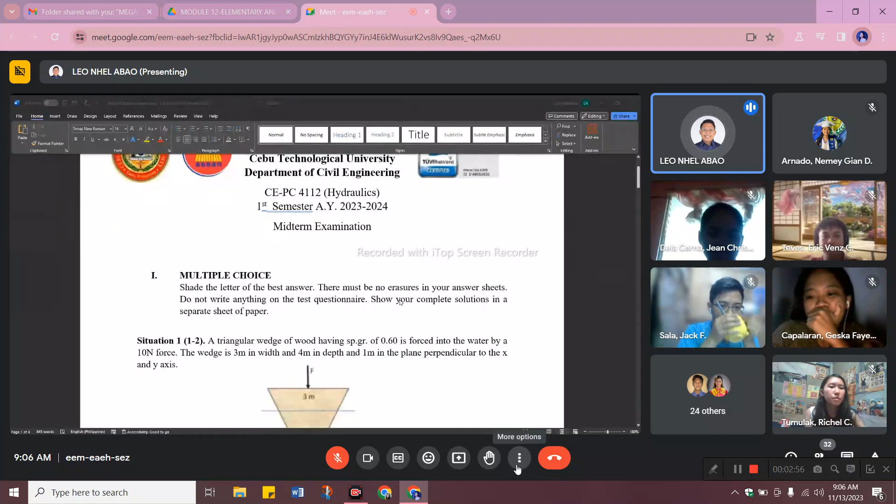Okay, so let us start. This one, situation 1 and 2. A triangular wedge of wood having SPGR 0.6 is forced into the water by a 10 Newton force. How do we solve this problem? Again, BF is equal to W. Remember, this is similar to other types of problems.

Now for BF, we have 9.81 times one-half times X times D times 1. For this X, this is our X — it's not constant since it tapers. And this is our D. This one, give me a moment, join me here.

So again, the most important part is how do we get X? By ratio and proportion. So by ratio and proportion, we can say 4/3 is equal to D over X. Then we get X as 3/4 D. After getting that, substitute it back in. We get our D as this one: 3.1 meters.

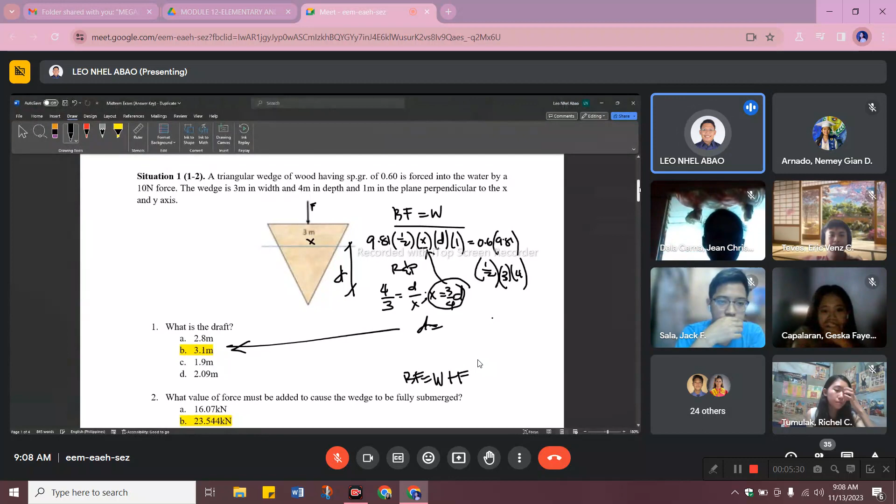So our equation now becomes 9.81 times one-half times 3 times 4 times 1, equals 0.6 times 9.81, so like this: one-half, 3, 4, plus F. Then we get our F as this one. Okay, I hope that's clear.

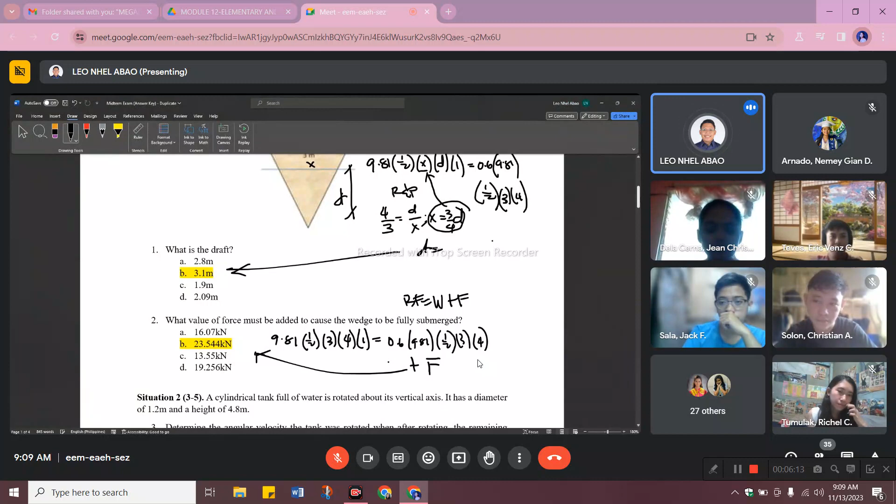Now let's move on to the next situation: a cylindrical tank. Again class, it's not stated here if it's open or closed, but if you look at the given questions, it says the remaining volume was 3/4 of the initial volume. So that means liquid spilled out, leaving 3/4 remaining — so it spilled. Since it spilled, it is an open cylindrical tank. It wouldn't be more full if it were closed, right? So from the problem, you can figure out it's open.

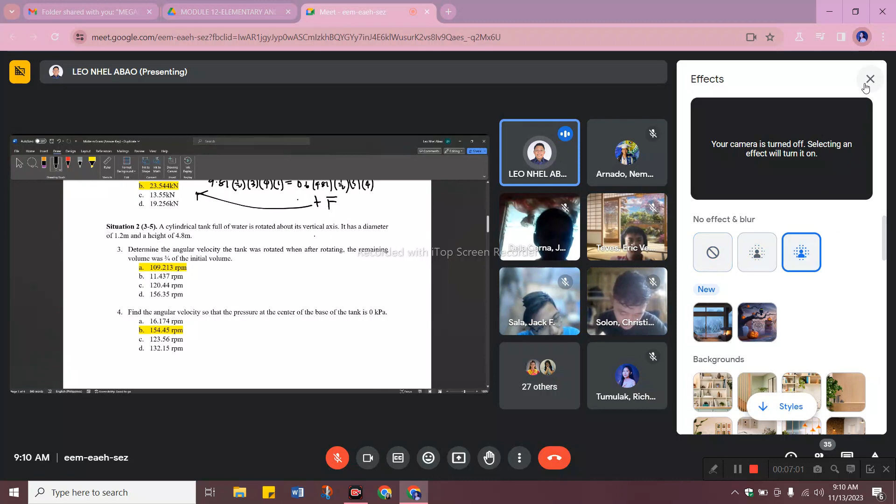Okay, so number 3, we are to determine the angular velocity of the tank. The remaining volume is 3/4 of the initial volume. I won't write out all the figures, so let's have this: Volume initial is just the volume of the cylinder, pi times 0.6 squared times 4.8, which I believe is 5.43. So V final is just 3/4 of this.

It's equal to 4.0725. No, that is in cubic meters.

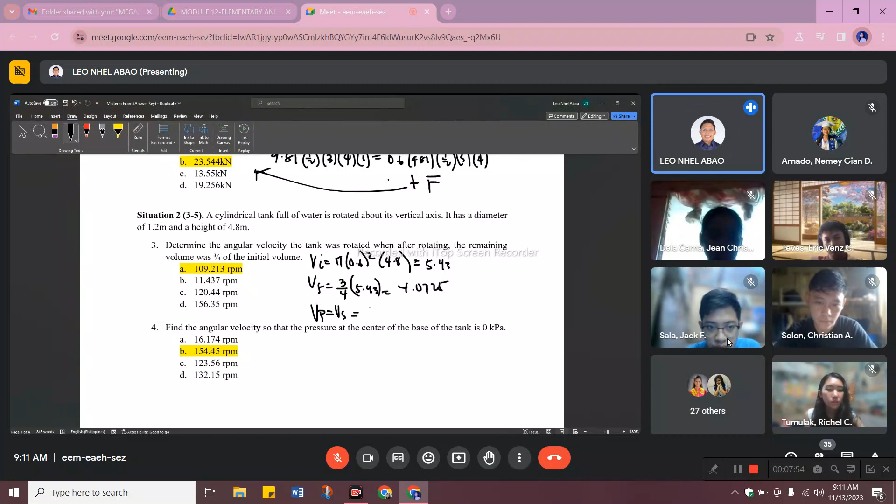Now, volume of our paraboloid is just equal to the volume spilled. Of course, it spilled, right? That's why only 3/4 remained. So how do we get volume spilled? Initial minus what is left, which is now above. So, 5.43 minus 4 point something is equal to

1.3575. Now again, this is just the volume of the paraboloid. So we can say this one, 1/2 pi r squared h is equal to 1.3575.

Letter A. Okay, because we can erase this. Erase.

Now, this one asks for the angular velocity so that the pressure at the center of the base of the tank is 0 kPa. So again, if pressure at the base, we take the height as the height of the cylinder. So what is omega? This is 154 something. That's the answer.

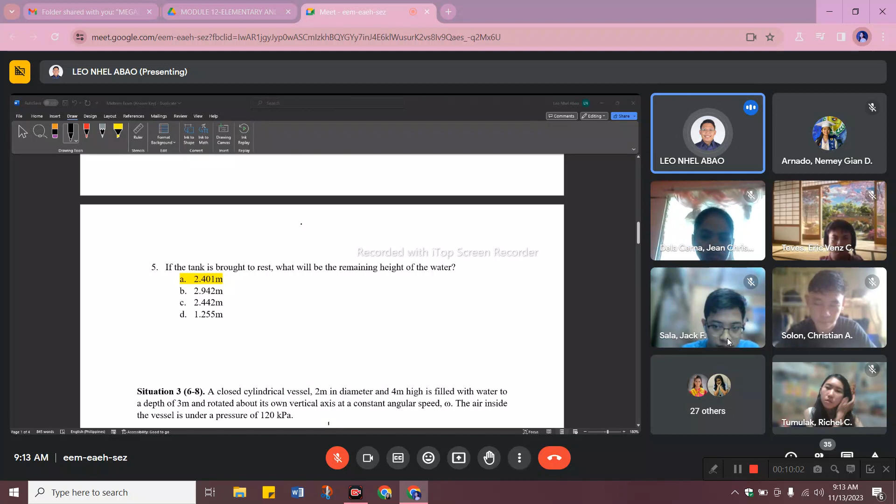So 2.401 meters. Again class, some asked if we should still consider the initial rotation, etc. But class, that is irrelevant. What's important is that it is brought to rest.

Meaning it's no longer rotating. So we can say volume paraboloid is equal to the volume spilled, where the volume of the paraboloid is just 1/2 pi r squared h. Given what we have, this is 2.714

cubic meters. The volume final is just equal to volume initial minus the volume paraboloid. So, volume initial, we get 5.43 minus 2.714. The answer is 2.716.

Okay, so this one, equating it to the volume of the cylinder, finding H, we have 2.401. Okay, that's the remaining height of the water.

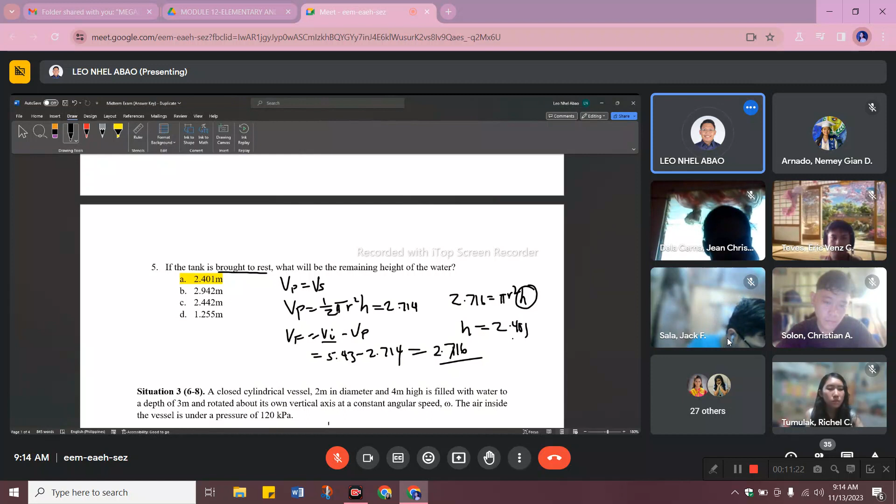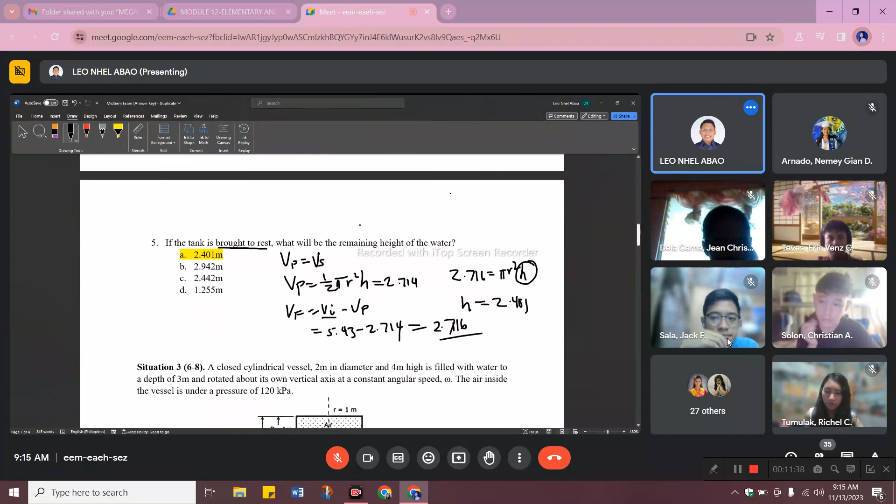Okay, let's move on to situation number 3. Closed cylindrical vessel. Let's go straight to the answers. Again class, I won't show the full solution since it's quite long.

So the answer is B, C, C for situation 3. You can find the solution in the reviewer. That's where I got this from.

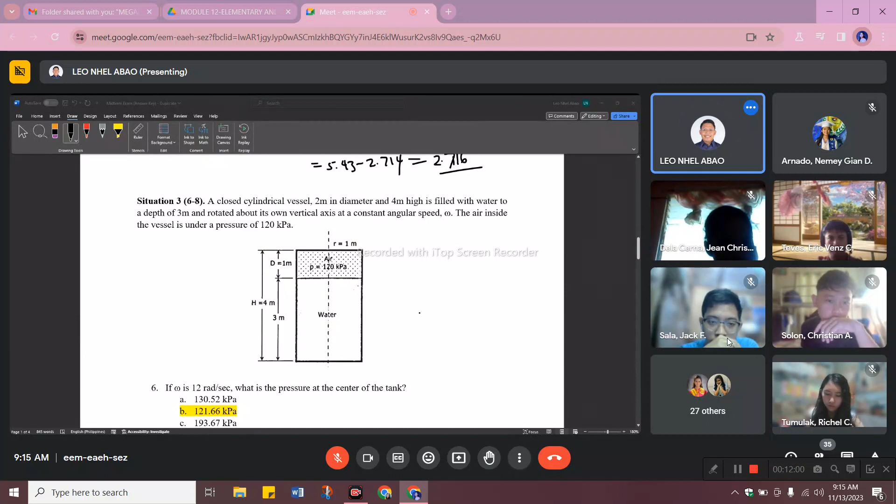Okay, and then if we set our omega to 20 radians per second, how much area of the bottom is uncovered? So that's the answer.

Now let's discuss the terms. Volume of fluid passing a cross-section of a stream is discharge. Okay, so again class, the keyword there is unit time. When we say unit time, it's a rate.

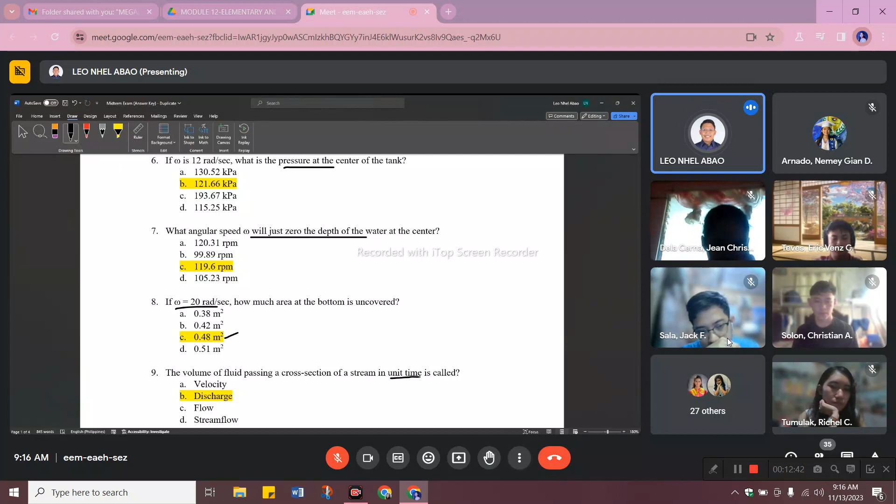So regarding the unit of velocity, class, what is the unit of velocity? Meters per second, sir. Meters per second. So that's wrong then, no? Because someone said volume. But it's not volume, so that's wrong.

What is flow? Flow versus flow rate. Again, flow is different from flow rate. Flow rate is the same as discharge, they are the same. Okay so again class, the answer here is discharge, volume over time.

Now, this one: the flow is said to be turbulent, where the path of the individual particles are irregular and continuously cross each other. Okay, this is what we discussed this morning about the types of flows, like laminar versus turbulent, where the path zigzags. So it's turbulent flow.

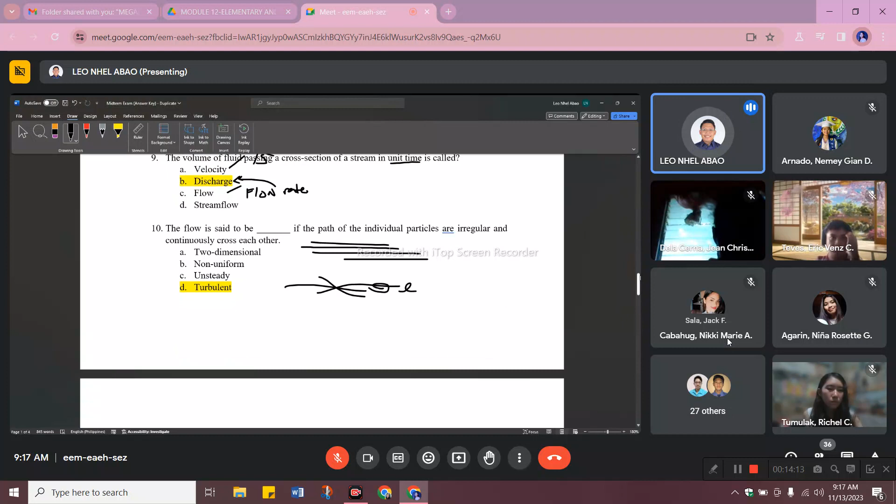Let's move on to this one, situation 4. I won't show the full solution since it's direct substitution. So, water flows through a 100 mm pipe at a velocity of 5 meters per second.

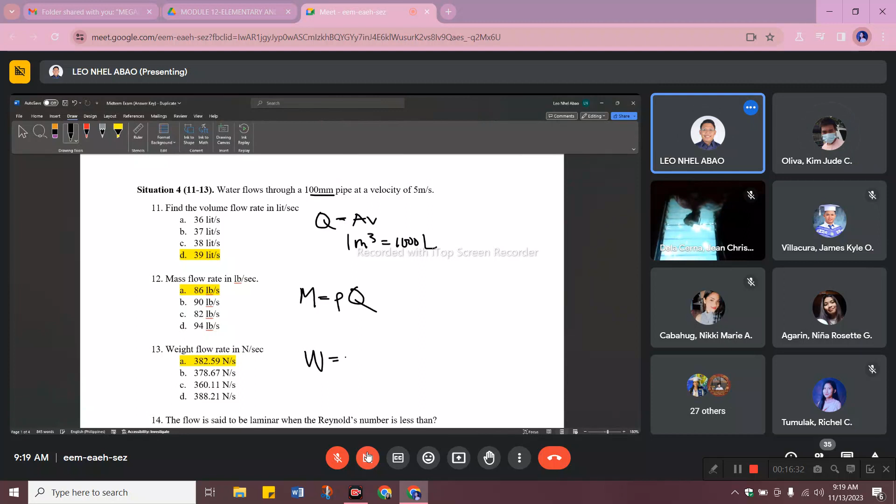How about weight flow rate? I believe I gave you the notes on this earlier. Weight flow rate is specific weight times Q, or you could also use rho times G times Q. So it's direct substitution again. You will get 382.59.

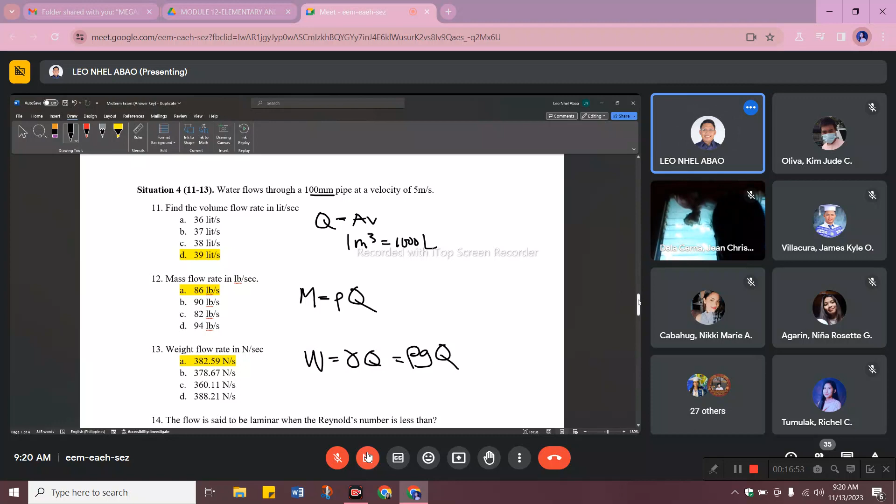Number 14: Flow is said to be laminar if it is less than 2,100. The device used to measure pressure heads in pipes where the liquid is in motion is called a piezometer.

So a barometer measures atmospheric pressure. A manometer is used for this. One famous type of manometer is the U-tube manometer, which is what we solved earlier.

A Pitot tube, for example, is used for moving fluid, shaped like an L. It measures the stagnation pressure. Later on, regarding fluid flow in pipes, we'll discuss the piezometer and the Pitot tube.

So this one, situation number 5. Gas flows through a conduit as shown. Again, class, number 16, where we determine the mass flow rate at section 2.

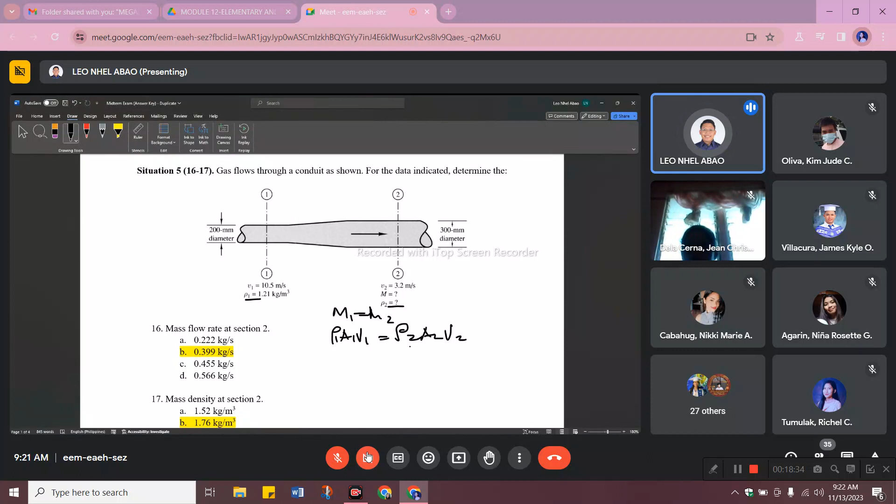So simply, class, we use continuity. We can say rho1, A1, V1 equals rho2, A2, V2. Since we're given different densities, we know this is M2. So to get M2, we just need to solve this, and since everything is given, it's direct substitution to get the answer.

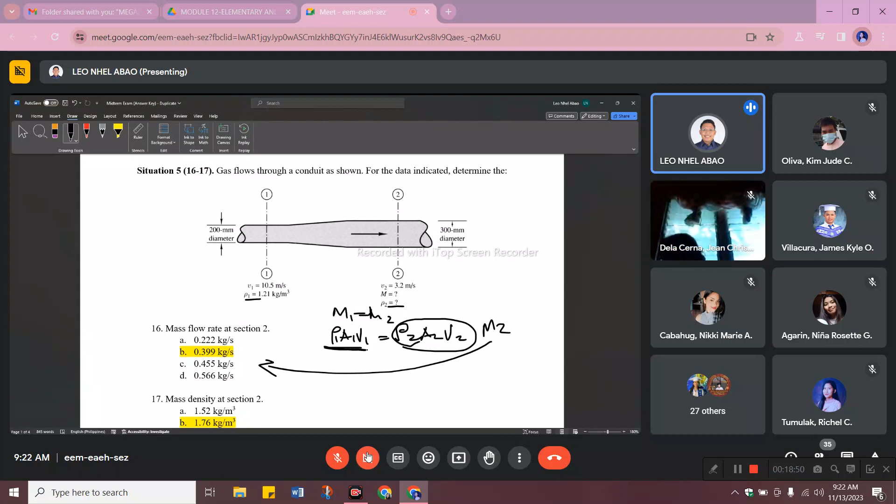Next is the mass density at section 2. So again, rearranging the formula, we are asked to find rho2, density 2. Simply rho1, A1, V1 over A2, V2. So we get density 2 as 1.76.

Okay, next, situation 6. I believe it's the same, same approach. So velocity at section 1, using continuity: A1, V1 equals A2, V2. So again, how do we get area 1? Pi over 4 times D1 squared, times V1.

But first we need to find this. So therefore, we can set up the equation so that V1 equals D2 over D1 squared, times V2. Given V2 is 5, therefore we get V1 as 11.25. Again class, direct substitution.

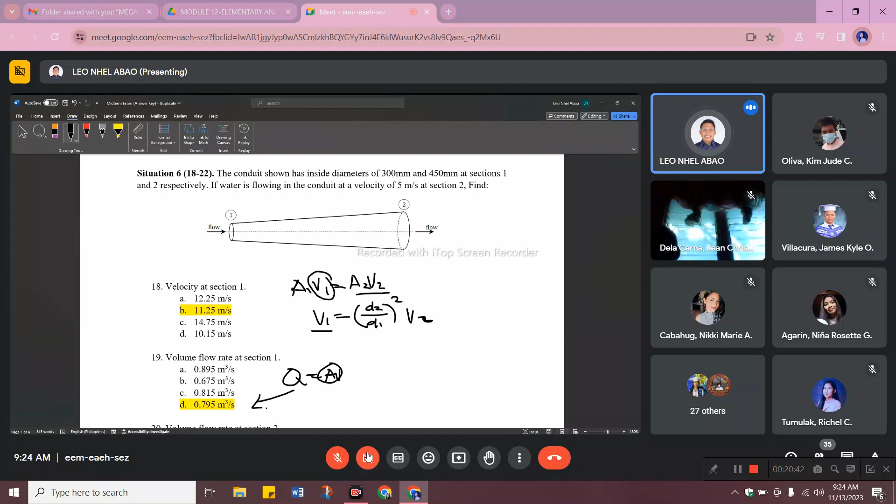What's left? Volume flow rate at section 2. This is just the same. Again, by principle, Q1 equals Q2. Why is that? Because fluids are generally incompressible. For incompressible fluids, there's no change in density. If we compress a fluid, the density becomes greater or more concentrated. So it's the same, by virtue of continuity.

But if you need to prove this mathematically, we can say: area 2 is pi over 4 times 0.45 squared, times 5. So, 0.45 times 5. I believe our Q2 comes out the same as before.

Now the weight flow rate. Weight flow rate is just this, or again, you can use this formula. I prefer to use this one: density times 9.81 times 0.795. We get this value.

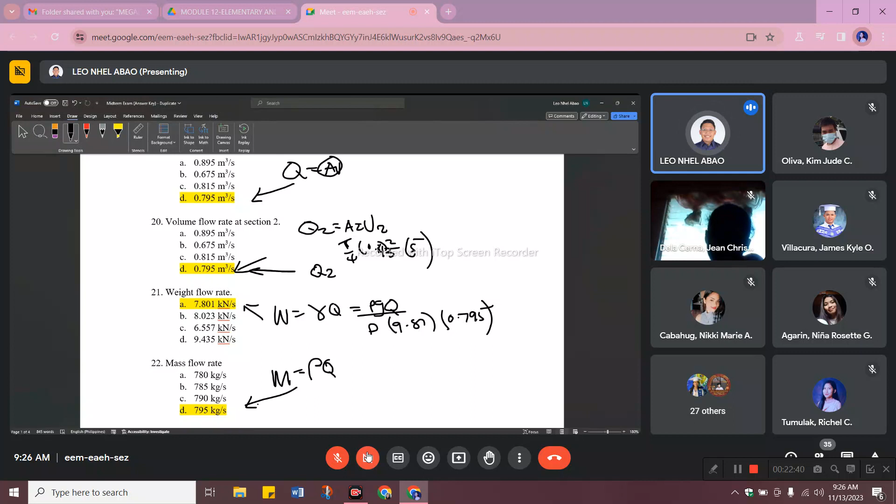Which of the following statements is incorrect? Letter A: Reynolds number is the ratio - the correct definition is the ratio of inertial over viscous forces, so this one is wrong.

Bernoulli's equation holds true along the streamline - this is correct, and we'll discuss this later on. For fluids at rest, the pressure is equal in any direction by virtue of Pascal's principle.

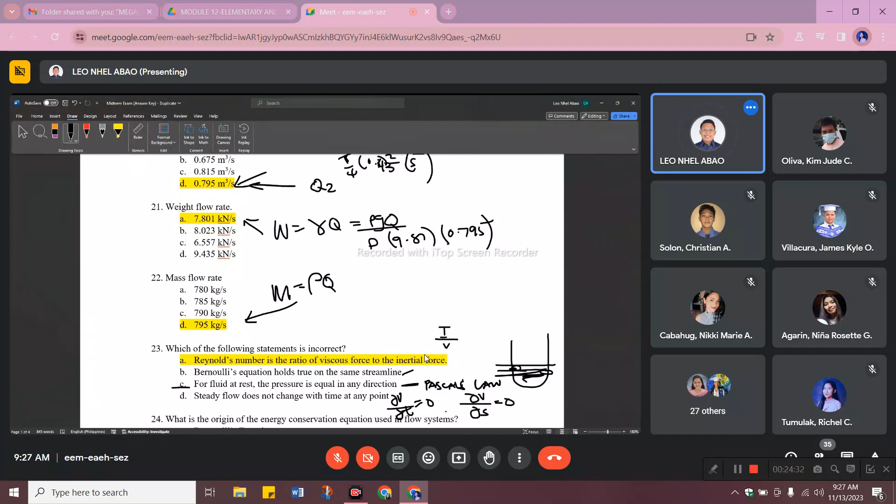Okay, we'll discuss this later on. Number 24: origin of the energy conservation used in flow systems. This is the first law of thermodynamics.

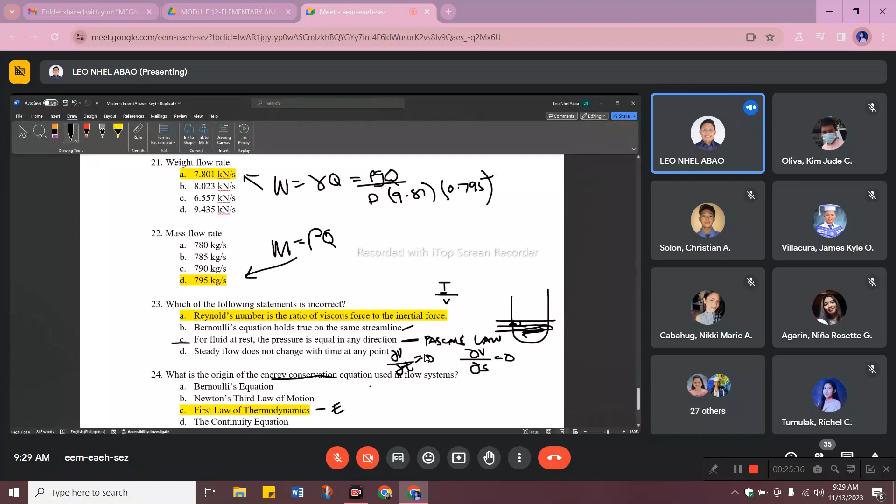Number 25: average velocity at cross-section is the same in any length or reach of a stream. We have uniform flow.

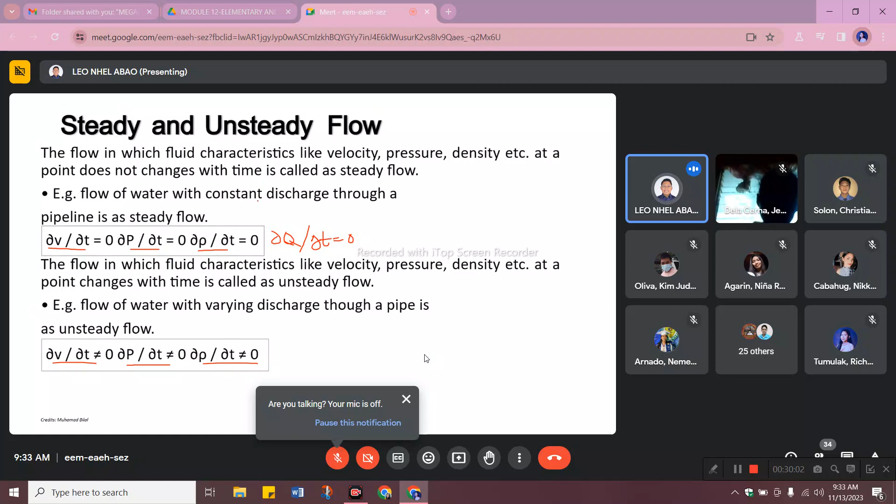For uniform and non-uniform, again imagine when it's uniform - it's clean flow. What is non-uniform then? There's a difference - it does not change with respect to a certain distance or length. That's why in this case, we use the variable s to indicate distance, meaning the velocity does not change with a specific length, so it equals 0.

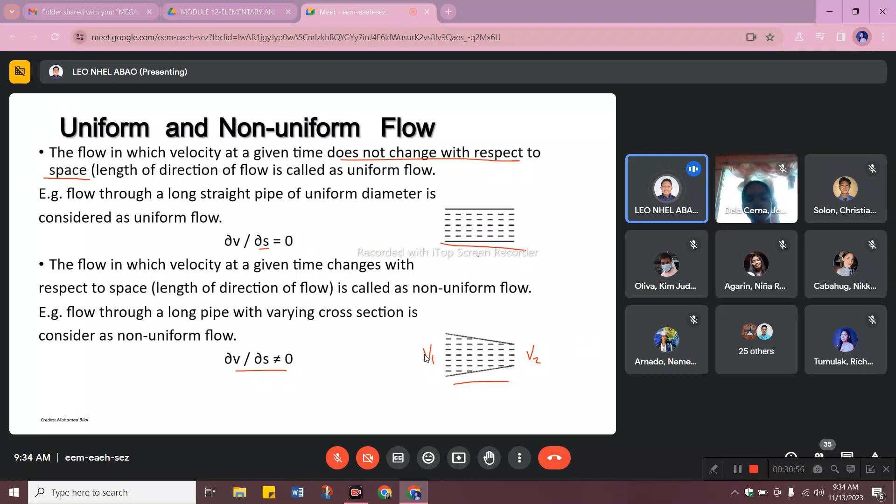So steady flows and unsteady flows can be either uniform or non-uniform. For steady uniform flow, the flow is steady and the cross-section is uniform. For non-uniform, the flow is still steady, but it tapers later on, so the flow becomes non-uniform.

Now for unsteady flow, it is uniform but not steady - the velocity changes with respect to time. For non-uniform, again it tapers and is not steady, so the velocity changes with respect to time.

Now let's go to laminar and turbulent flow. This is laminar, and this one is the turbulent.

Laminar flow is when the adjacent layers do not cross each other, or it moves along a well-defined path. An example here is the flow in our blood vessels - well-defined path. If ever it does not move in a well-defined path, maybe during high blood pressure or tachycardia, but basically it moves in a well-defined path.

When we say turbulent flow, adjacent layers cross each other - it does not move along a well-defined path. In this case, this is a turbulent flow. General examples are flows in a river or canal, or smoke from a chimney, in cases of gases.

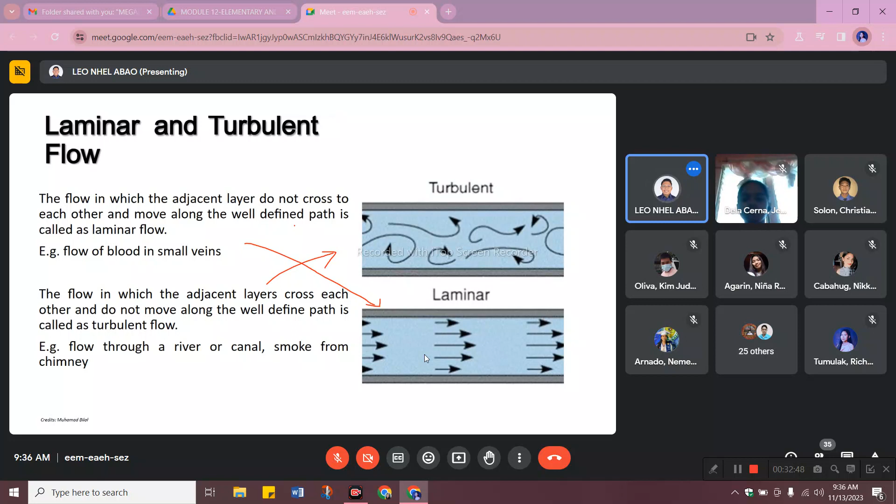We also have compressible and incompressible flows. So question class, is water compressible or incompressible? Compressible, sir. Compressible, okay? That's what they say - that water is compressible.

If you take a syringe, like an injection, and put water in it, cover it with your fingers and try to compress the water in there - can you compress it? No, sir. So generally class, liquids, good example is plain water, is treated as a non-compressible fluid.

So water we treat as incompressible. Unlike gas - if you plunge it, it can compress significantly. So in general, gas is much more compressible than liquids.

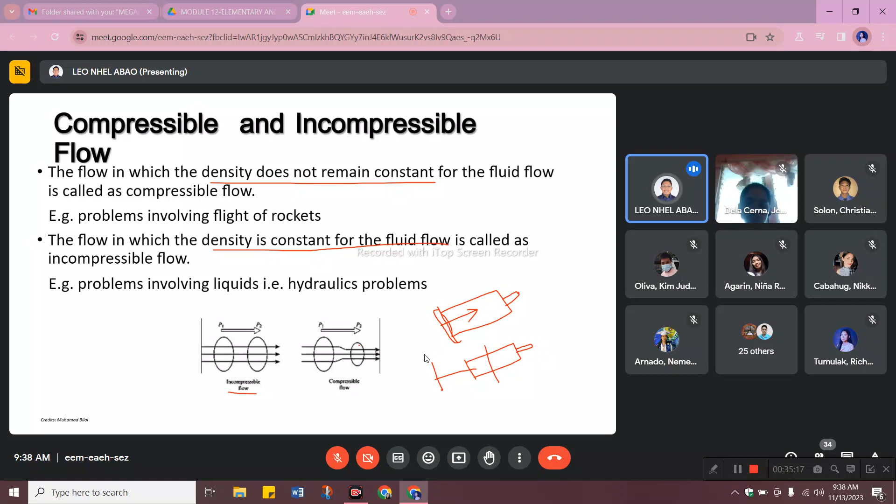Now, discharge or flow rate. Again, flow rate is just the amount of fluid passing through a section per unit time - amount of fluid in liters or cubic meters. So there are different expressions or forms of flow rate - it could be using volume, mass, or weight. Let's go through these formulas as discussed.

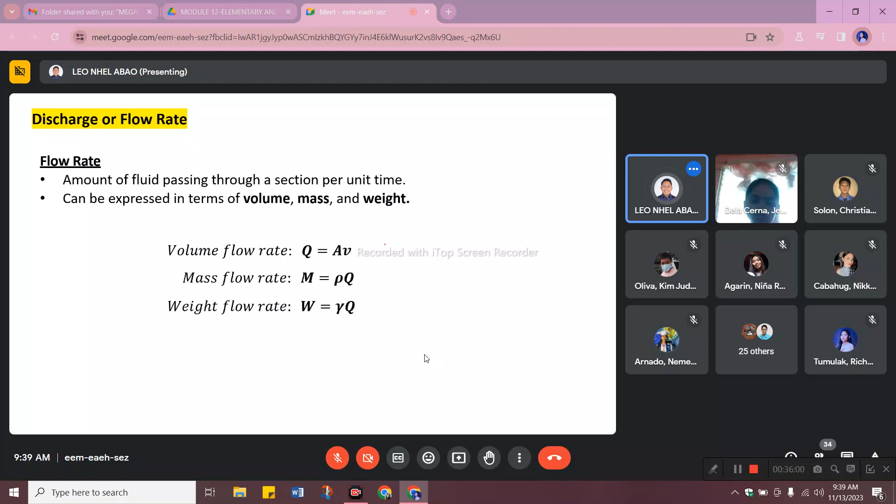Q equals AV. Mass flow rate M equals density times Q. Weight flow rate equals unit weight times Q. Now let me clarify the units, since this might be confusing. The unit for Q is cubic meters per second - AV, where area is in meters squared and velocity is in meters per second, so it equals out.

For mass flow rate, the unit is kg per second - this equals density in kg per cubic meter times cubic meters per second for Q. Cancel out, and we are left with kg per second.

For weight, we have newtons or kN per second - don't forget the kN. So unit weight is kN per cubic meter times cubic meters per second, giving us kN per second. Again, same concept, just expressed differently.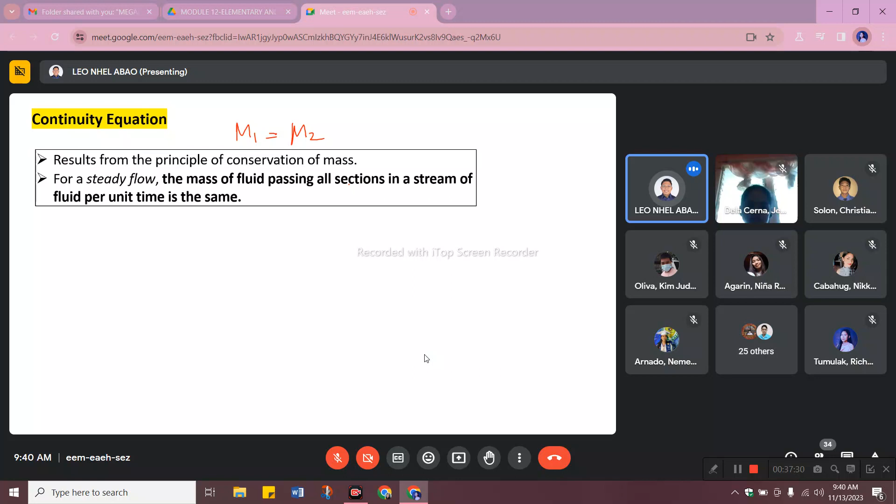Let's talk about the continuity equation. The continuity equation results from the principle of conservation of mass, meaning the mass flowing at one point is the same mass flowing at another point - just like rice being measured. So for a steady flow, the mass of fluid passing all sections in a stream of fluid per unit time is just the same. That's what continuity means - what goes in comes out.

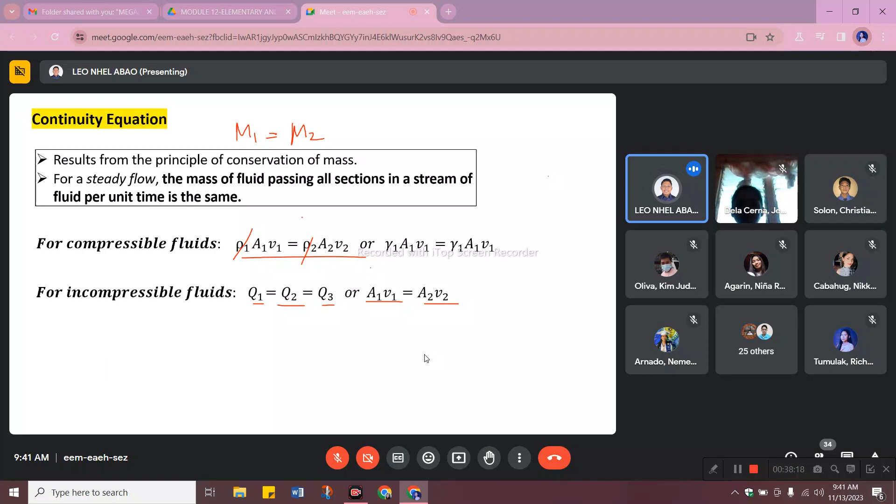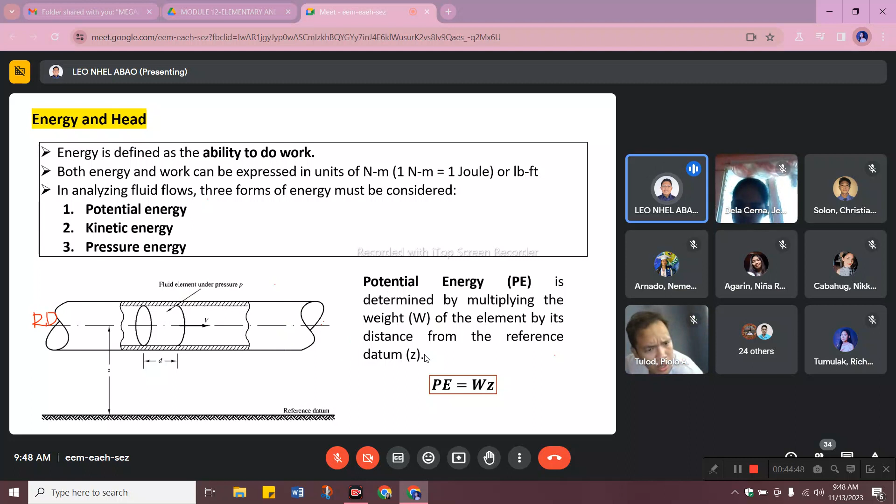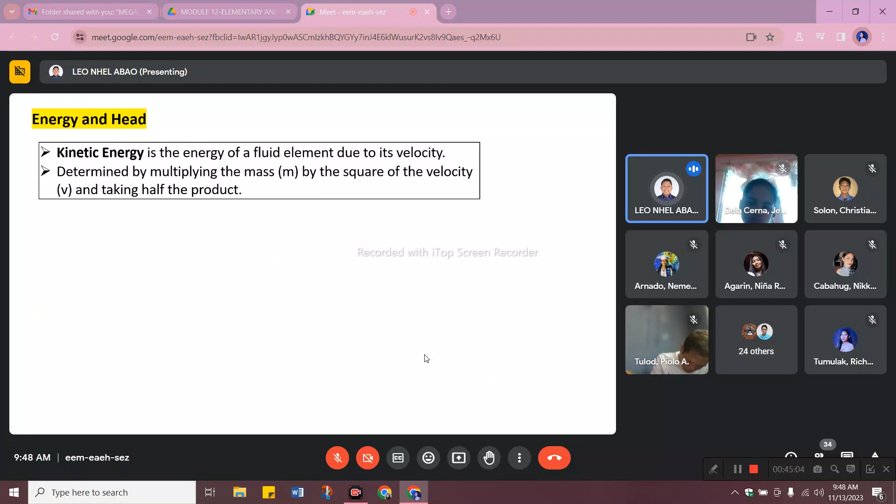Now let's go to kinetic energy. Kinetic energy is the energy in motion, or the energy of a fluid element due to its velocity. This is determined by multiplying the mass by the square of the velocity and taking half of the product. I believe this formula is very familiar: kinetic energy is just 1/2 mv squared, mass multiplied by velocity squared, then divided by 2.

Now since we're talking about fluid flows, let's rewrite this by expressing m in terms of weight. So our equation for kinetic energy becomes 1/2 wv squared over g.

Let's move on to the final one, pressure energy, also known as flow energy. This is the amount of work required to force the element of fluid across a certain distance against the pressure. In textbooks, the usual notation for this is FE, since PE is already potential energy. This can be evaluated using this equation: it's just the work done, the product of pressure, area, and length.

Again class, we can also rewrite this in terms of volume, since we know that area times length (AD) is just volume. And we also know that volume is equal to weight over unit weight, since unit weight equals weight over volume. So by rewriting, we get this equation, which is now our flow energy or pressure energy.

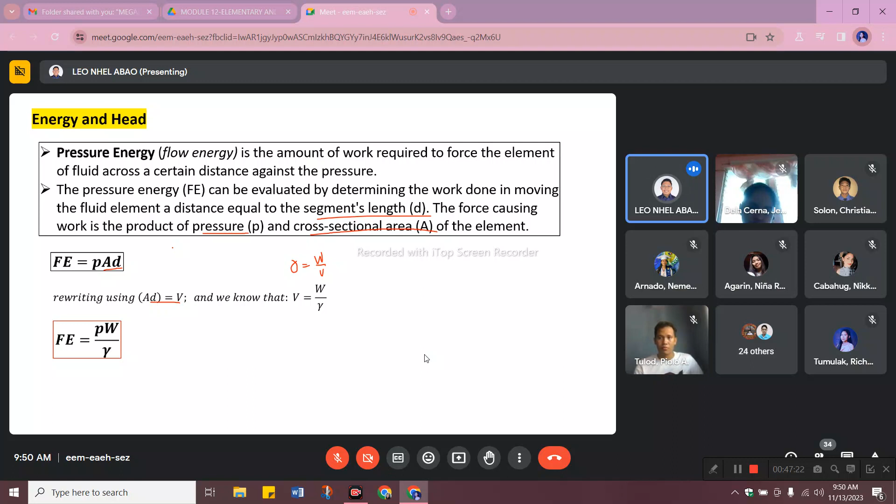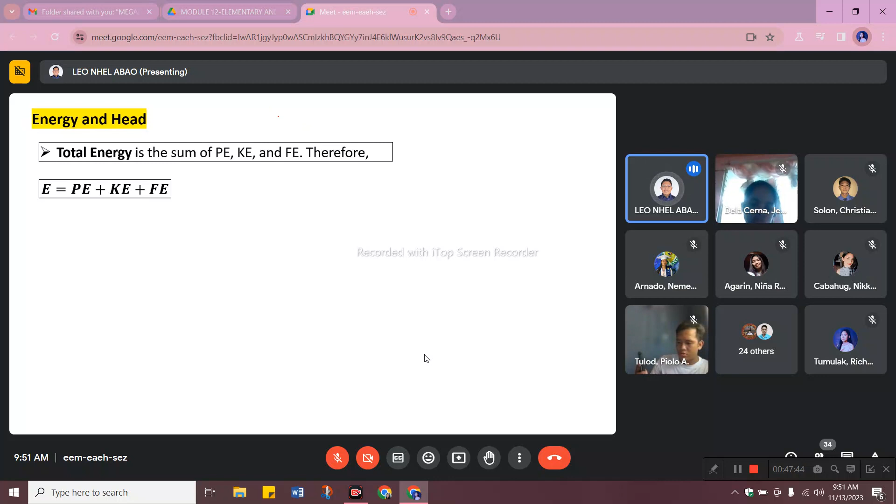Now let's talk about total energy. Again, there are three forms of energy. So in order to get the total energy, we sum up all three: we simply add PE, KE, and FE. Therefore our equation becomes this. So this is the total energy that flows in a pipe system.

So this one here is our potential energy, this is our kinetic energy, this is our pressure energy. Again class, this is in energy notation when dealing with fluid mechanics, where each term of the expression has units of N-m or pound-foot, since these are all forms of energy, and we know energy has units too.

Now, when we deal with fluid mechanics class or hydraulics problems, it's usually expressed in terms of head. If you recall from prelim, we discussed what's called pressure head. So energy is often expressed as head, or the amount of energy per unit weight of a fluid. The units of head are in meters or in feet, since it's easier to measure when expressed in terms of head.

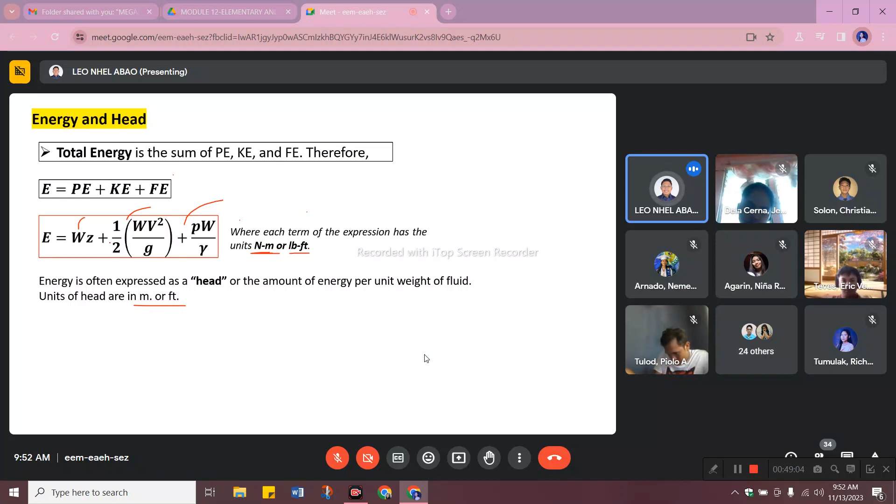For example, by the continuity equation, energy 1 equals energy 2, by the law of conservation of energy. If we divide both sides by weight, it remains the same - what goes in equals what comes out. Now our equation becomes this one in terms of head. Each term here, I divided by weight.

So this is now our equation in terms of head. We have Z, this is known as the elevation head. And this term, V squared over 2g, is now our velocity head.

Pressure over unit weight - this is now the pressure head. If you remember, pressure is equal to unit weight times height. Therefore, our pressure head is just this.

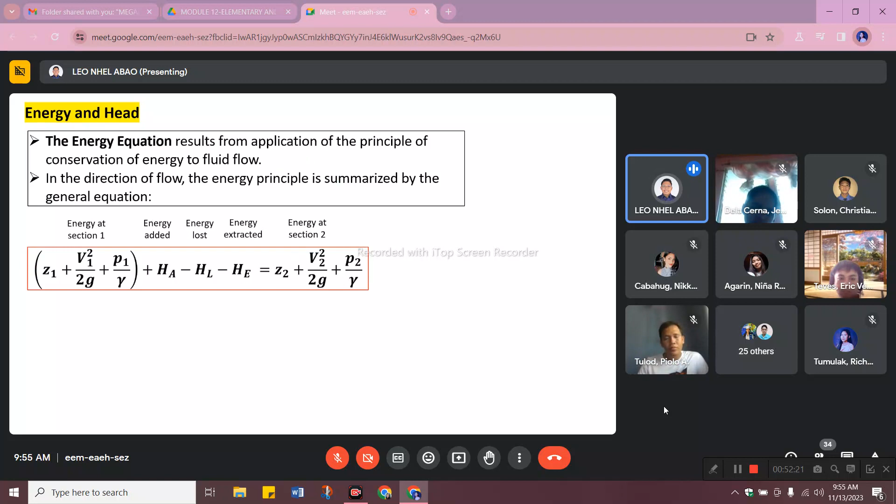So basically, in terms of head, this is the energy at section 1. We have here the potential, the kinetic, and the pressure, plus energy added.

What case do we have where energy is added to a fluid flow? For example, you want to bring water up from the first floor to the 10th floor. You need a large amount of energy to do that work, right? So what do you do? We add energy.

How do we add energy? By pumping it, so the water can rise. One way to add energy is we use a pump. This is the most common case in fluid mechanics problems - there's energy added by a pump introduced into the system.

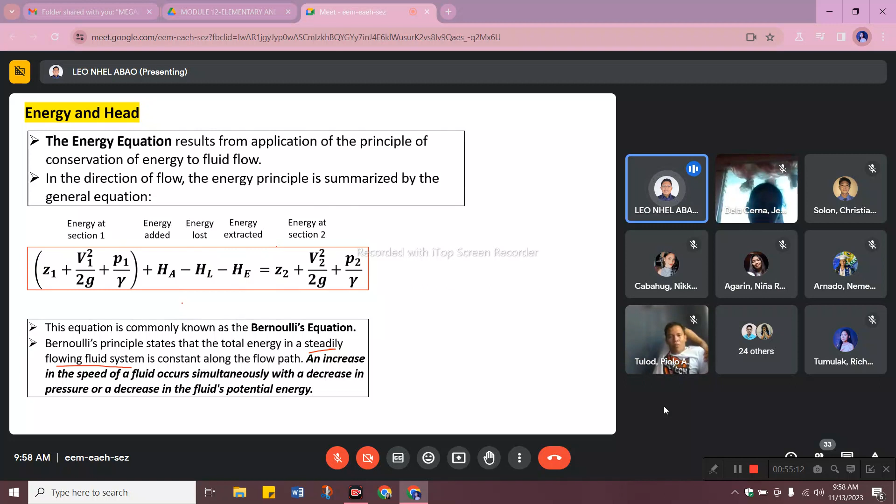Now let's move on to Bernoulli's equation or principle. According to Bernoulli, the total energy in a steadily flowing fluid system is constant along the flow path. He said an increase in the speed of a fluid occurs simultaneously with a decrease in pressure or a decrease in the fluid's potential energy.

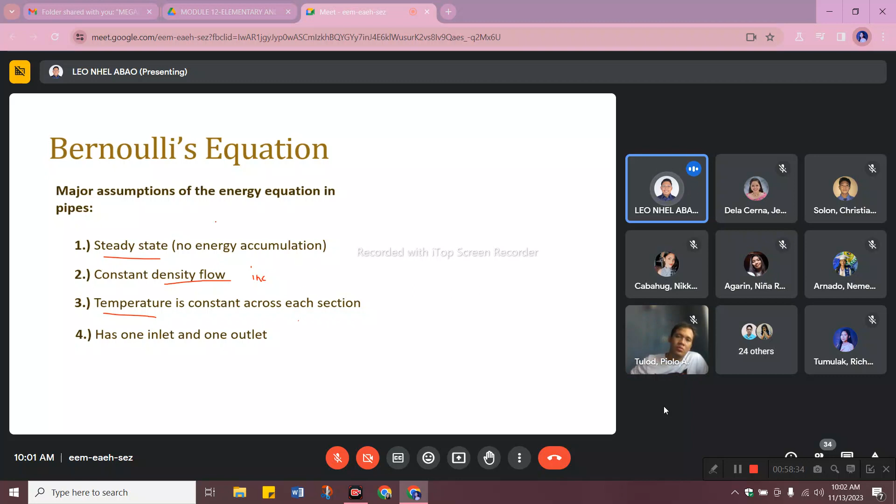Temperature is constant across each section. This temperature assumption takes more effect if our fluid is a gas. So usually this is applied in thermodynamics. Number 4, there is one inlet and one outlet. Okay, so those are the basic assumptions of Bernoulli's equation.

So we have two important terms here. We have the energy grade line, also known as the EGL. We also have the hydraulic grade line, or the HGL. So both of these are just graphical representations of the energy in our flow. Again class, these are just graphical representations of the total energy of the flow. Where does this representation come from?

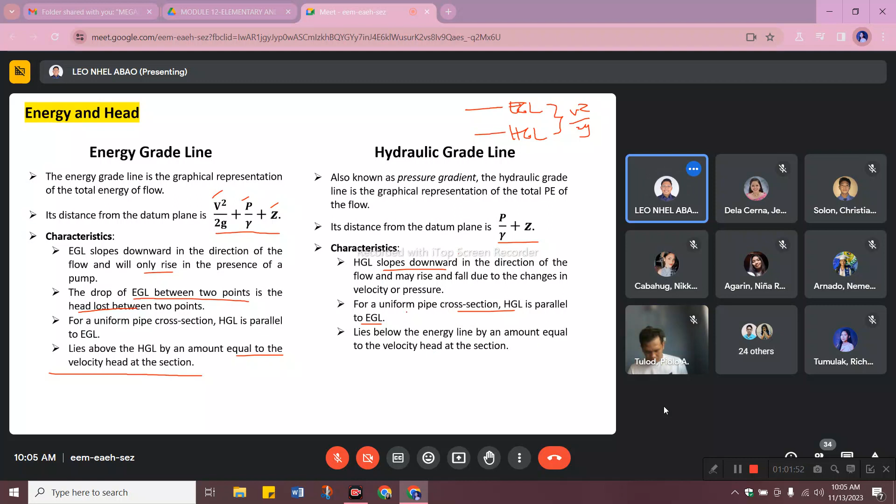Okay, now what is this one class? Again, HGL is just the sum of the elevation head and the pressure head. So HGL equals elevation head plus the pressure head.

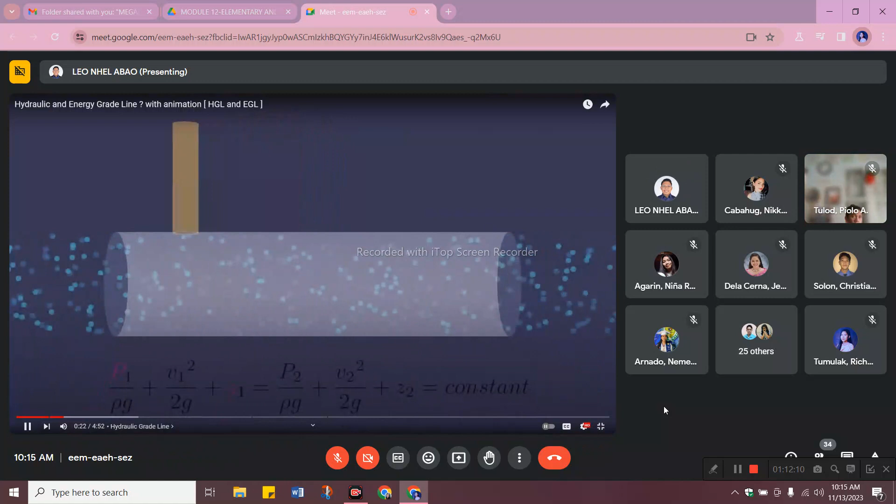Hydraulic grade line can be visualized with a piezometer tube. It measures static pressure by calculating the liquid column height through the center of the pipe. If you tap a piezometer into several locations and draw the curve through the liquid level, the hydraulic grade line is obtained.

Notice, the hydraulic grade line just represents the sum of static pressure and the elevation heads. Elevation head depends upon the datum we choose. Now we choose the center of the pipe, but we can choose anywhere.

Now what if the same pipe is inclined? In this case, a change in elevation head will affect the hydraulic grade line. With change in elevation head, there results an increase in hydraulic grade line.

You can imagine hydraulic grade line as potential energy, which is related with Earth's gravity and datum. Energy grade line is the sum of potential and kinetic energy, so it's the total energy of a fluid. In order to visualize kinetic energy, which is related with the velocity of water, we need a pitot tube.

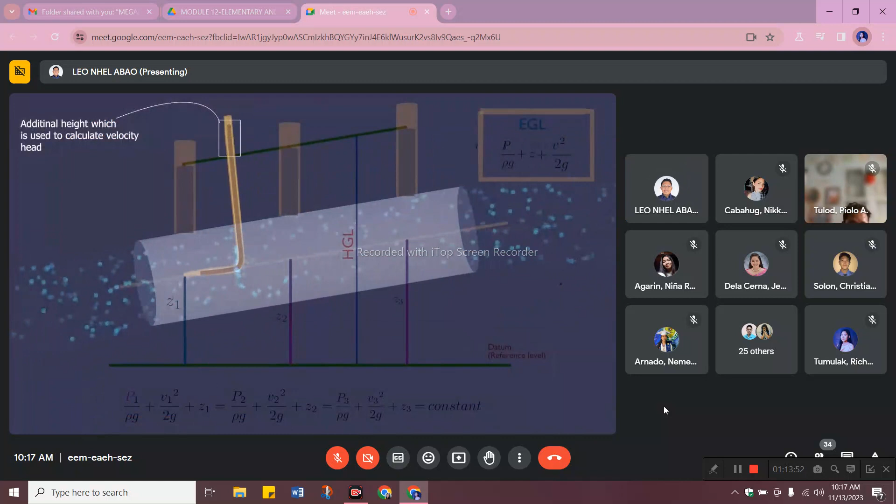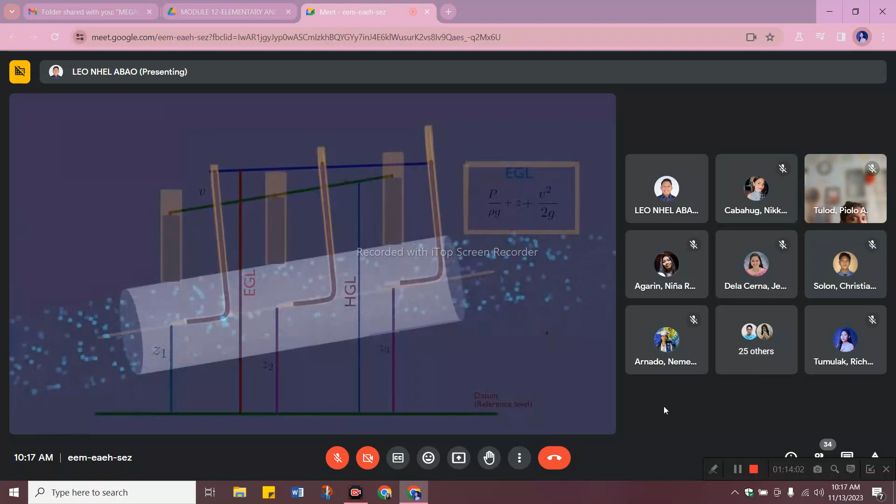The extra height the water column travels is related with the velocity of water, and if you draw the curve, you will get the total energy, also called the energy grade line. The distance between EGL and HGL is the dynamic or velocity head. You can also imagine it as kinetic energy.

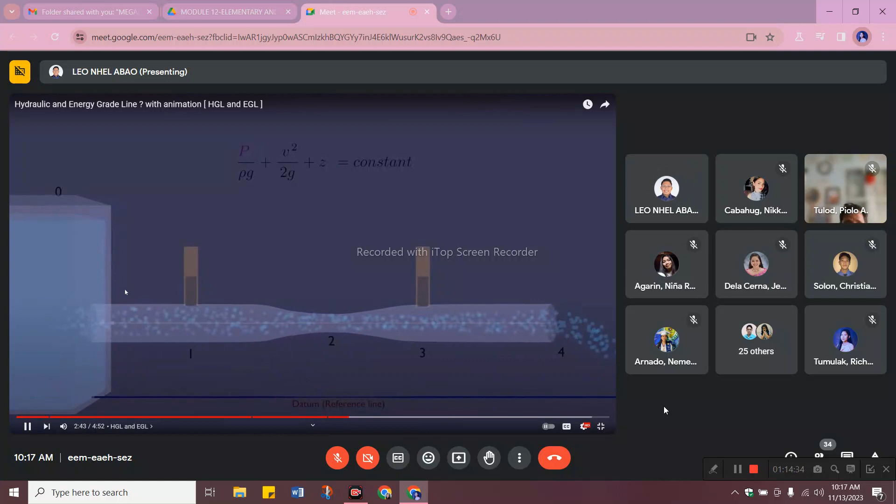By fitting piezometers at different locations and drawing the curve, the black and blue line is also the HGL line. Blue line denotes pressure and black line denotes elevation head, and the sum of these two lines is HGL. And the pink one is the velocity head.

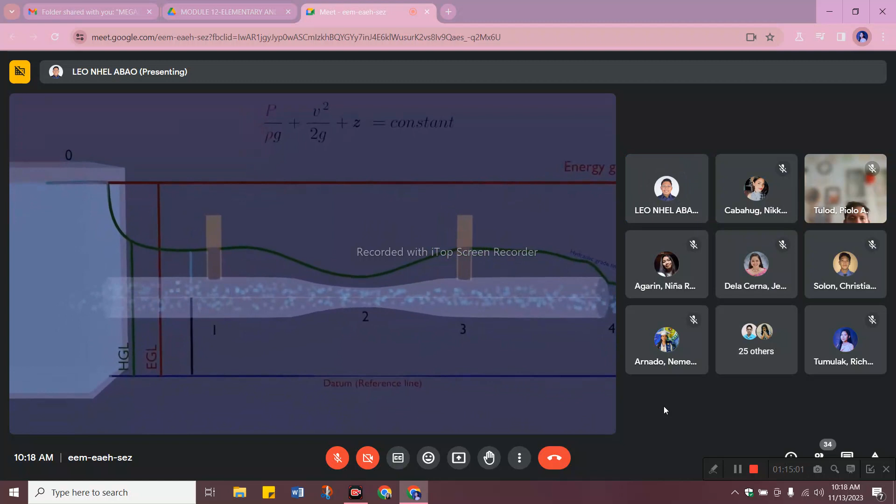At point 0, that is, at the liquid surface, EGL and HGL coincide with the liquid surface, since there is no flow or velocity there. In an idealized Bernoulli type flow, EGL is horizontal, and its height is always constant.

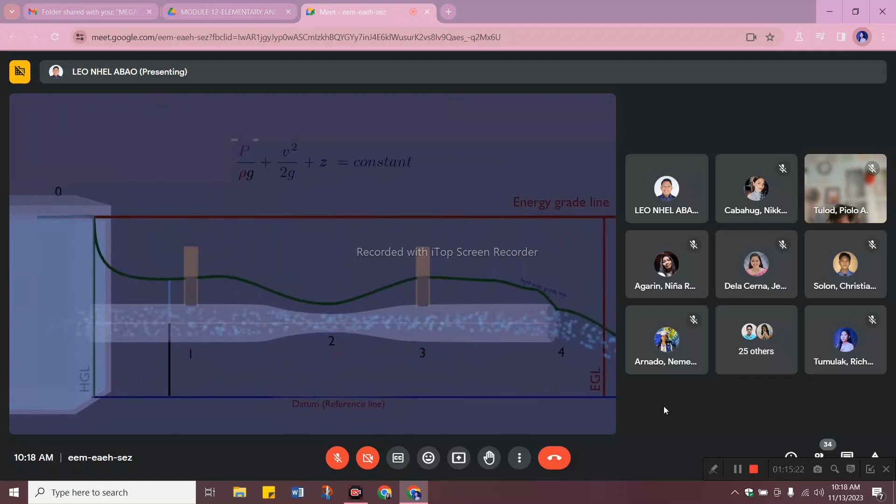HGL decreases rapidly as the liquid accelerates into the pipe. The difference between EGL and HGL is velocity head. HGL is the sum of pressure and elevation head. Velocity of water increases at point 2, so HGL decreases, and velocity head increases.

Then again along the length of the pipe, the HGL increases as the velocity decreases. You can imagine HGL as the potential energy which is greater than kinetic energy. And the sum of potential and kinetic energy is the total energy or EGL.

And finally, HGL decays to the liquid surface at the outlet, since the pressure there is atmospheric, as the pressure head is 0. However, EGL is still higher than HGL by the amount of velocity head.

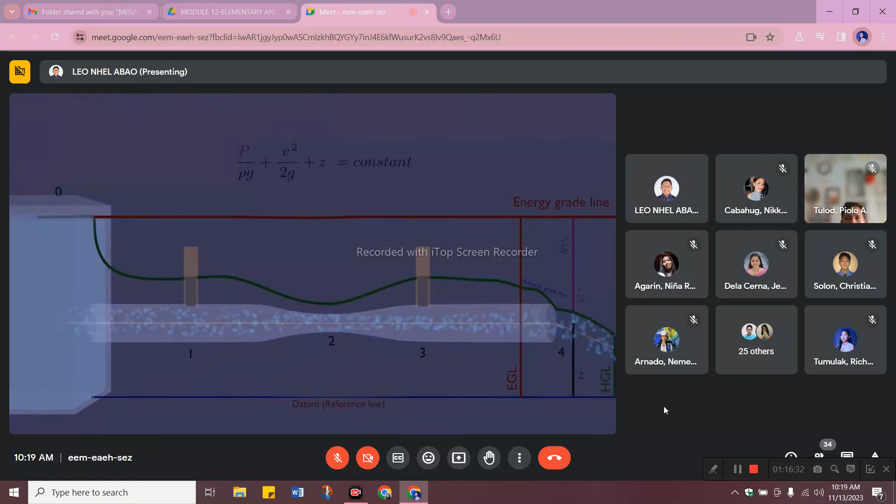Remember, in real life there is always the presence of friction and heat, which decreases the total energy of the fluid, so EGL will never be horizontal.

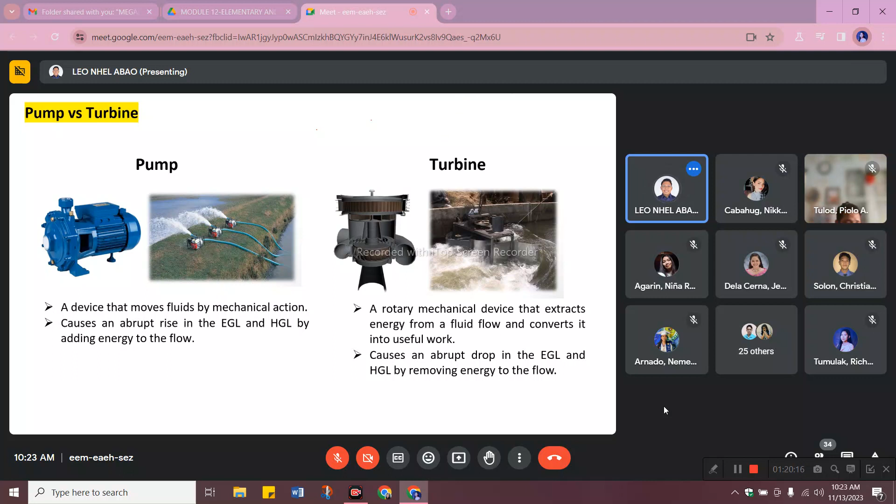Now let's have sample problems, class. For the fundamentals of fluid flow, I won't give sample problems on the continuity equation since you already answered those in the midterms. Let's focus on energy and head instead. Oil of SPGR 0.75 is flowing through a 150 millimeter pipe under a pressure of 103 kPa. The total energy relative to a datum plane 2.4 meters below the center of the pipe is 17.9 kN-meter per kN. Determine the flow of oil.

Let's analyze the problem. What's the diameter of the pipe? It's 150 millimeters, under a pressure of 103 kPa. The total energy is relative to a datum plane. Let's clarify what total energy means here, relative to the datum plane, 2.4 meters below the center of the pipe. So where is this 2.4 meters located? It means 2.4 meters below the center of the pipe.

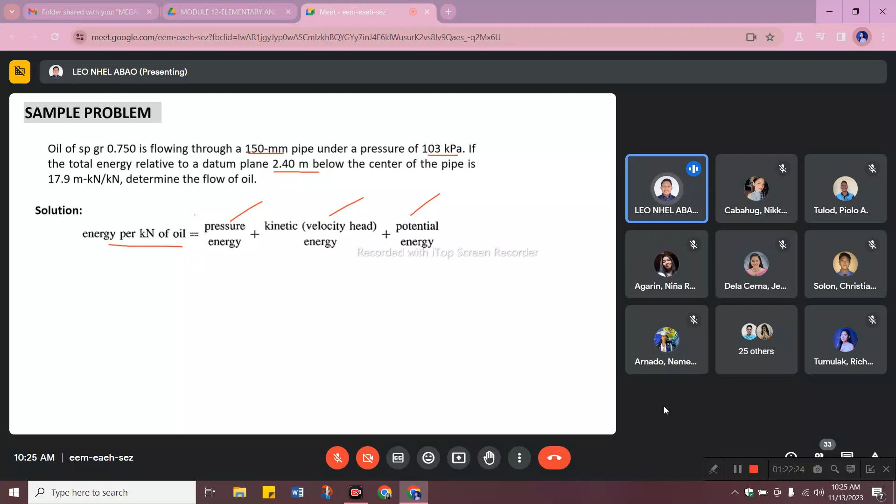Let's solve this. When we say energy, this is just pressure energy plus kinetic energy plus potential energy. But when we solve fluid mechanics or hydraulic problems, we express it in terms of head. So here, 17.9 is stated as the total energy, in kN-m per kN, which is just the head.

Remember how we derived this, dividing both sides by the unit weight, which is why it can get confusing. But essentially, it's just the head, expressed in meters. So this is the total energy, or the head.

Now let's get the pressure energy. This is pressure over the unit weight. Let's write it out clearly: total energy equals pressure over unit weight, plus v squared over 2g, plus potential energy, which is just z. So 17.9 is the total, pressure is 103 over the unit weight based on the SPGR, plus v squared over 2g, plus the potential energy head which is just z, the elevation from the reference datum. Since we're asked to determine the flow of oil.

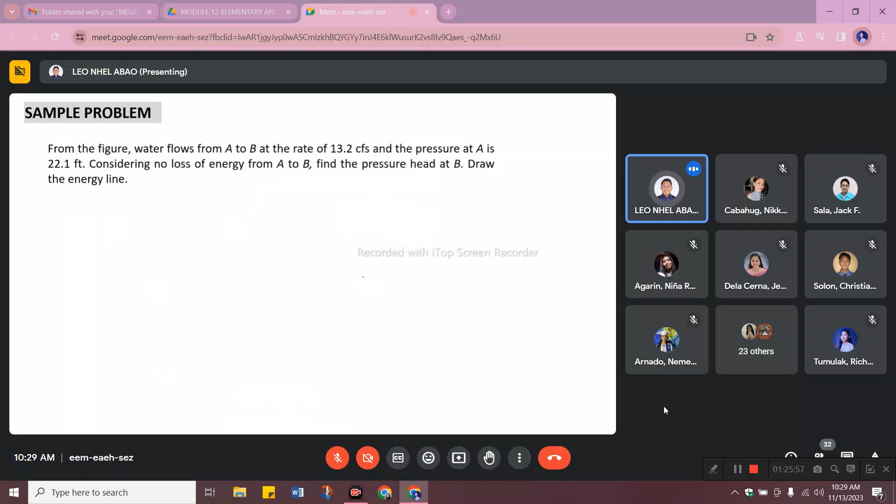From the figure, water flows from A to B at the rate of 13.2 CFS and the pressure at A is 22.1 feet. This is pressure, and as you can see the unit is in terms of feet, so this means it's a head. Considering no loss of energy from A to B, find the pressure head at B.

We are also asked to draw the energy line. So given the hydraulic grade line, we need to form the energy grade line.

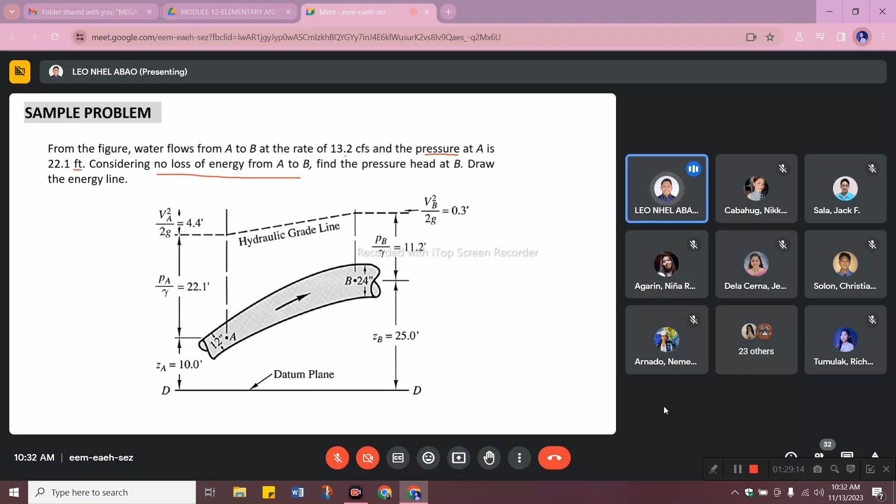Okay, now what is being asked is to find the pressure head at B. Now how do we find the pressure head at B? Again, we use Bernoulli's equation from A to B.

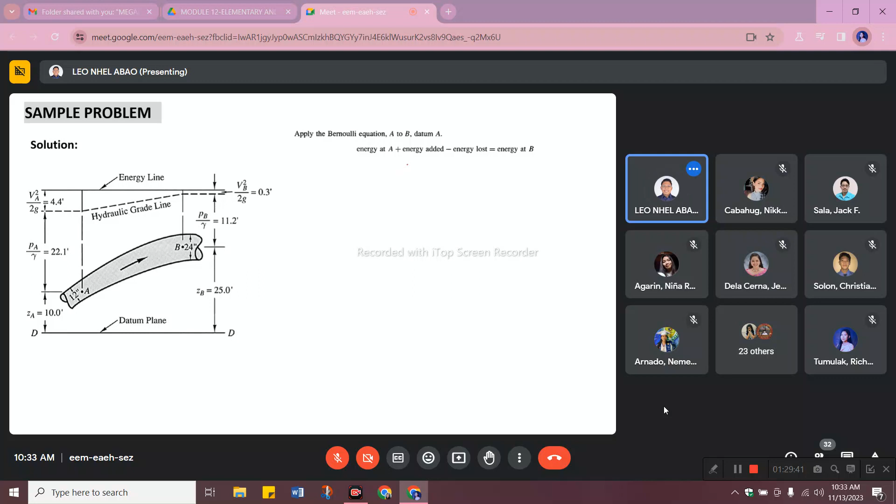In the problem, the given is at A, so energy at A plus energy added if any, minus energy lost if any, is equal to energy at B. But since it's given that there's no energy loss, that term becomes zero, so it cancels out in our equation.

Where given is our velocity, this is just equal to Q over A. So this is 13.2 divided by the area, pi over 4 times 1 squared, so we have 16.8.

For the 24 inches, 1/2 squared times 16.8, this is just equal to 4.2 feet per second.

Now substituting class: pressure head at A is 22.1, plus velocity head, 16.8 squared divided by 2G, is equal to pressure head at B, plus velocity head at B, plus the elevation head at B.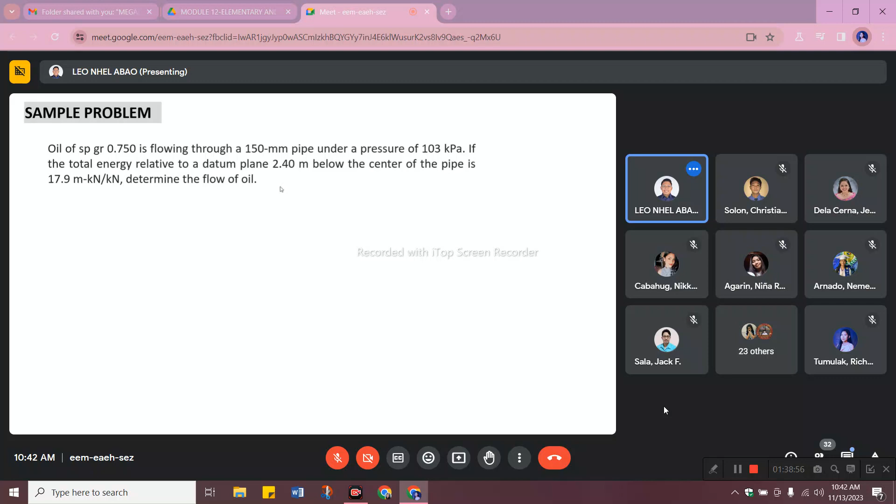Any questions? Okay? I hope you got it. So again, we have the pressure head, the velocity head - can you see that? We get the velocity, 3.82, and then we have the elevation head. So that's it, class.

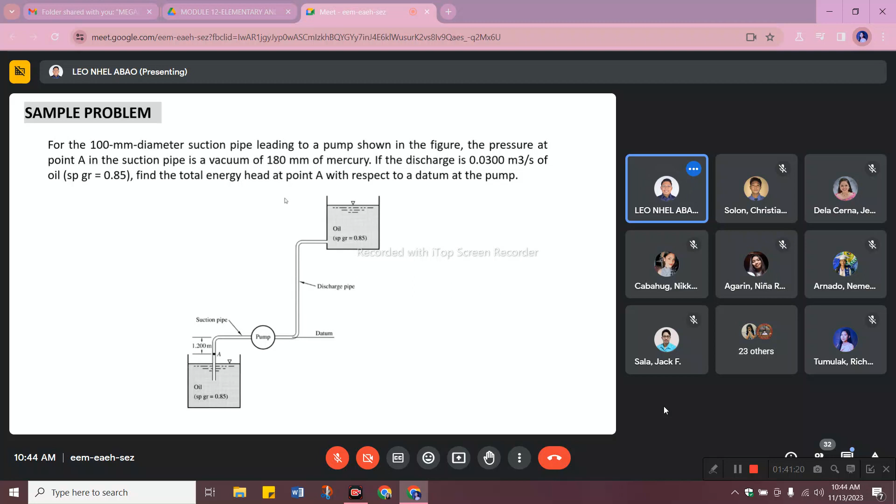So do you have any questions? Last call. Why is it negative 1.2, sir? Based on our reference datum, since 1.2 is at point A. Okay sir, so it's not negative 1.2? Okay, so it should be minus 1.2.